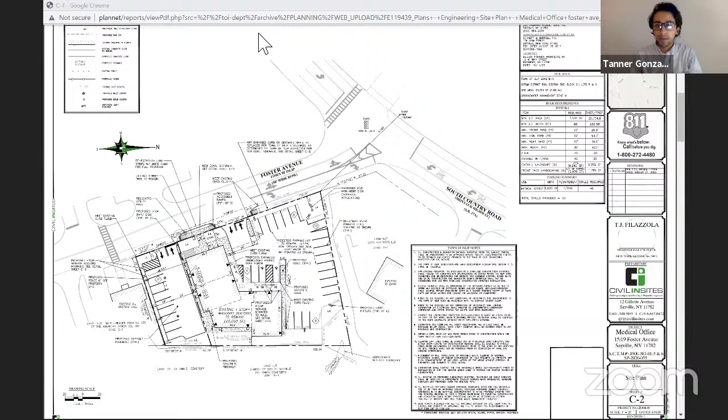Thank you. Any questions for the applicant or Mr. Gonzalez? I'm not seeing any. Mr. Garbarino, you're okay with what Tanner just said in terms of the 2 conditions? Yes, absolutely. And I'd like to say something.

I've lived here all my life, and this application where they're demolishing the 1 vacant building and putting parking in its place will really make this corner look good. Right now, it's this vacant building. It was a church, jammed in there for years. And then the previous hardware store was a laundry, and when they moved Brinkman there, they really cleaned up the area pretty good. But now with demolishing the church to the south, it's really going to make this corner stand out. So visually, I can see it only as an improvement.

Thank you. Is there a motion? Mr. Moriarty? Yes, I would move to close the hearing and to grant the application subject to the modifications to the conditions that Tanner outlined. Thank you. There's a motion by Mr. Moriarty to close the public hearing and grant the application subject to the conditions as modified by Mr. Gonzalez. Is there a second? I'll second. Mr. Ferruggia. Everybody had their hands up and only one had their mic unmuted, so we'll give it to Brian. Second by Mr. Ferruggia. All in favor? Aye. Aye. Opposed? Abstentions? The application passes.

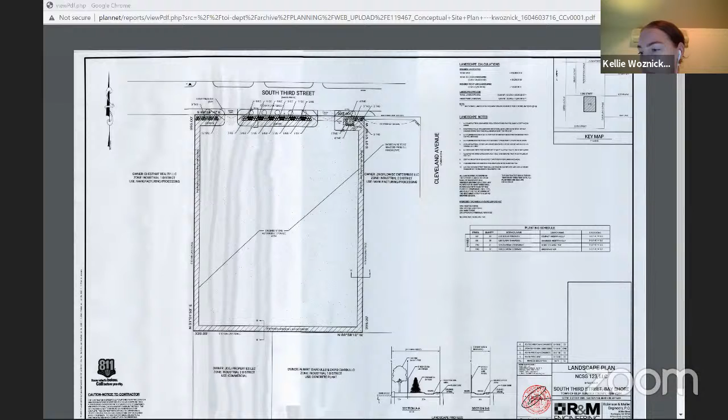The storage yard will be used for surplus motor vehicle dealership inventory and is located adjacent to industrial uses. The applicant is proposing a site plan which is in substantial conformance to the site plan referenced in the covenants and restrictions, with landscape and fence screening along South 3rd Street. Therefore, planning recommends the board grant the application subject to the attached conditions, which require screening of the vehicles and prohibit the storage of junked, wrecked, or leaking cars or parts.

Thank you, Ms. Woznick. Any questions for Ms. Woznick or the applicant? No, not seeing any. Is there anything further from the applicant? I'll take that as a no. Is there anyone who would like to make a motion?

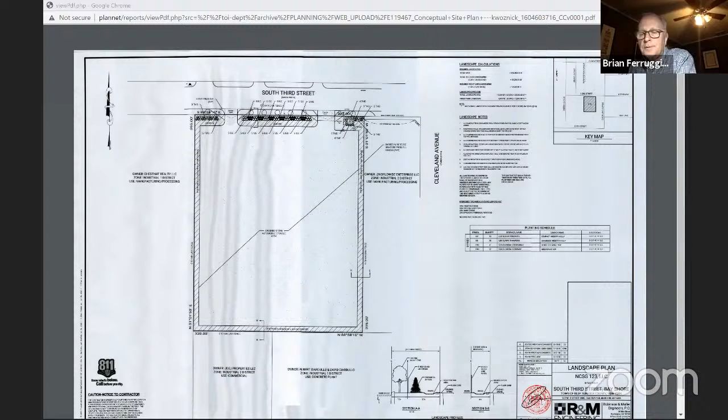I'll make a motion, Mr. Chairman, that we close this public hearing and grant the application subject to the conditions. Thank you. There's a motion by Mr. Ferruggia to close the public hearing and grant the application subject to the conditions. Is there a second? I'll make a second. Second by Mr. Matamore. All in favor? Aye. Opposed? Abstentions? The application passes. Thank you. Thank you.

Item 4 on the agenda, Planning Board application public hearing, Tian Li Li, PB 2020-025, east side of Constance Court, south of Kings Highway, aka Rabro Drive, County Route 6, Hauppauge, 11 Constance Court. Applicant requests a Planning Board special permit for a showroom in the Industrial 1 District pursuant to 68-340.1R. Site plan modifications may also be requested as part of this application. Good evening to the applicant.

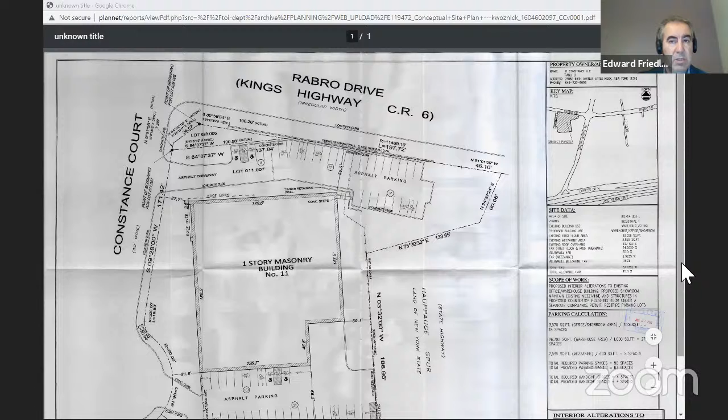Good evening, everyone. Hope everyone's doing well. John R. Bracco, architect, 111 Railroad Avenue, Sayville, New York, on behalf of the applicant Tian Li. We're here before you tonight in regards to converting existing office space to showroom space within this existing industrial building. The space in question equates to about 12% of the overall square footage of the building. The applicant, who recently purchased the property, owns a kitchen cabinet and countertop company and is looking to set up kitchen displays in what was the old office area.

This property does have a previous site plan approval, and the current site layout is nearly identical to the previously approved site plan. There is an existing mezzanine open to the warehouse and used for storage that existed prior to my client's purchase of the property, which is currently not on the CO and which we'll be legalizing with the building department. However, as you can see from the submitted site plan, the building still meets the parking and floor area ratio requirements with the existing mezzanine included. And if the board has any questions, I'll do my best to try and answer.

Thank you. I have nobody signed up to speak on this application, so I'm going to go to a staff report from Ms. Woznick, and then we'll come back for questions. Thank you. The subject property is located on the southeast corner of Constance Court and Rabro Drive in Hauppauge. It's improved with a 30,000 square foot industrial building that received a CO in 1985. In May, the property was issued a stop work order for conducting interior alterations without the required permits. Tonight, the applicant is looking to obtain the necessary showroom special permit in order to continue with the interior alterations.

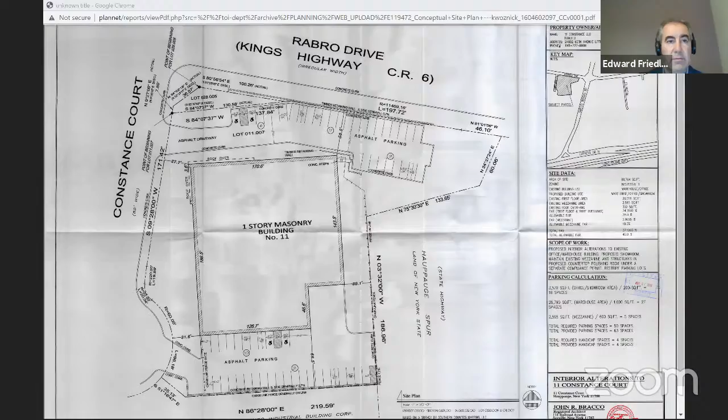Item 5 on the agenda, Town Board Application Public Hearing, 31 Union Corp. CZ 2020-019, east side of Union Avenue, approximately 283.25 feet south of Montauk Highway, State Route 27A, Islip, 31 Union Avenue. Applicant requests a change of zone from Residence B to Residence CAA District in order to permit 3 two-family dwellings. Site plan modifications are requested as part of this application. Good evening to the applicant.

Good evening, Mr. Chairman, members of the board. My name is Mel Gonzalez, MIG Architect, PLLC, located at 1050 Nichols Road, Islandia, New York. I'm here on behalf of my client for 31 Union Corp. Currently the property is a Residence B, and we're proposing a change of zone to a CAA district. The current property has 3 structures on it. The existing structure, which is on Union Avenue, is a 2-story, 2-family dwelling, which has a C of O and is compliant.

And the remainder of the property is mostly paved. I would say about 85% of the property is paved, very little landscaping. And there are 2 other buildings. At one time, this was a well drilling company, and one structure is a story and a half, and the other structure is a one-story barn. The one-story barn, which is closest to the town parking lot directly to the north of the subject property, is approximately 5 feet from the property line. And the existing structure to the south of the property is approximately 3 feet 11 from the property line.

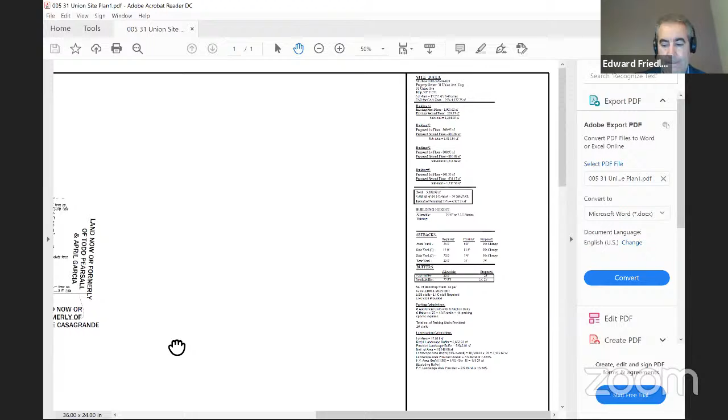Okay. And then one application that I looked at said that we were talking about changing zone GST to CAA. Is that a different kind of zone than Residence B? Everything I've seen initially that was sent out said Residence B to CAA. Yet on the permit that the applicant supplied, it says GST, G as in George, S as in Sam, T as in Tim. Is that a zone? Well, the call of the meeting tonight is change from B to CAA. Correct. I'm not sure where the other one came from. But it's in all the applications that were sent to the town planning board as GST. It's actually on the document that says Town of Islip Department of Planning, town board special permit, and it says existing zone GST, dated June 17th of this year. I'll ask the staff to address that part as well. Okay. So those were a few things that I'm confused about.

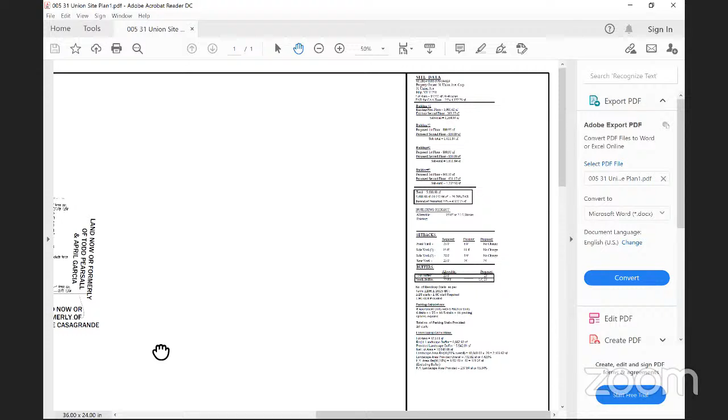I also wanted to know, is the applicant talking about using this property as apartment buildings, like a garden apartment? I'm very confused about how it will be used. Okay, so type of apartments. It's a residential area, and now it's saying 8 apartments on the site, and yet they're saying in other places 6 apartments. So is that because the house itself was a legal 2-family house? That's my understanding, but we'll readdress that once we go through the public comments. I'm just going to ask you, you're over 3 minutes, to please try and wrap up.

Okay, so my basic concern is I do think that this property has a much larger impact on the current zoning. I don't think that this should go through. Based on the fact that everything I see has a lower square footage than what the applicant is talking about tonight, I do think that this is going to stress the neighborhood.

When we walk up to that town parking lot and to Chase Bank, the rear of Chase Bank, on rainy and snowy days, there's a huge drainage problem there. It's flooded, it doesn't drain. You would almost need wading boots to get through there. That's never been corrected, and I don't see how adding more homes is going to help us.

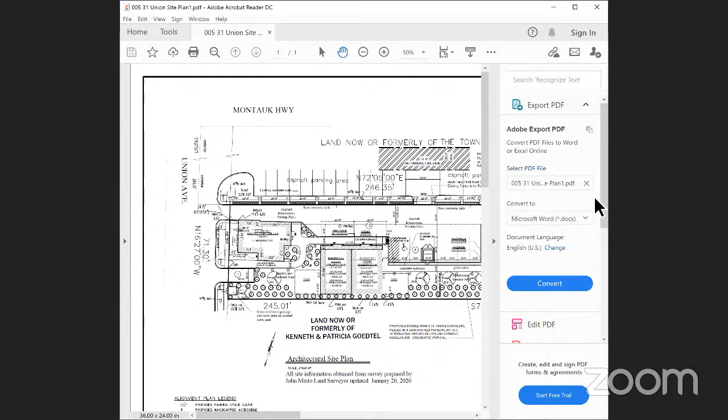Also, the entrance on the west side. You're aware that the entrance to the main parking lot is also on the west side, I would say 15 feet to the north of that. That's a very, very confusing traffic condition with people turning in and out of that parking lot and then also pulling into that same driveway. Has there been a petition to actually put a stop sign anywhere there? Because right now, that's a very, very busy turn off of Main Street.

Added to that, Union is the main traffic flow to the library. So you're looking to increase traffic on the single block by the 8 apartments. Question about the parking. If there's going to be 8 units, you can assume there may be 16 residents. The gentleman has already asked for a reduction in parking. But naturally, that overflow parking would fill the town parking lot, which is already extensively overfilled much of the day.

Those are my concerns. One question I have for the town: we know that we have a parking problem in the town of Islip, in the hamlet of Islip. This does not solve it by adding more residents next to a parking lot that's already over congested. Has the town considered this property for public domain in any way? I will ask staff that question along with the other ones when we finish the public hearing. All right, thank you.

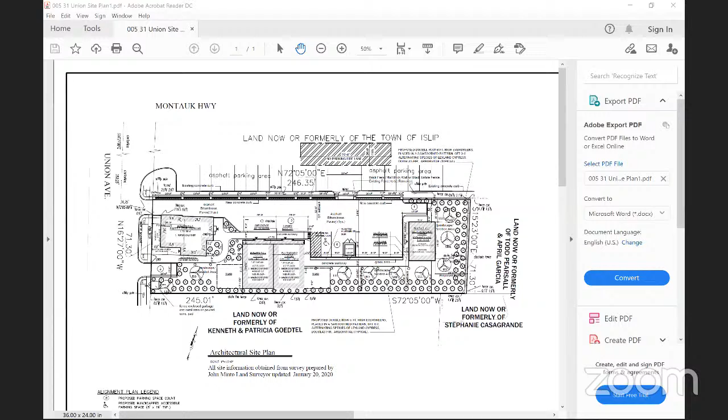Can't hear anybody. Mr. Chairman, you're muted. Can't hear me then. All right, how's that?

Can anybody address, was the original notification that went out a different change of zone, not from B to CAA? Did this start as something else? Is anyone aware of it being different? Certainly on what we have on the call tonight, it's B to CAA. Not to my knowledge, Mr. Chairman. Mr. Colgan, has it been B to CAA as far as you know? That's the way the town has received it and advertised it since its inception.

Okay. And then I guess there's a question about the lot size, what the actual lot size is here. Well, the town records indicate that it's actually approximately half an acre. It's not impossible that either the town records or the survey is incorrect. That was something we'd have to look into further to verify the correct number. I can speak to that effect, Mr. Chairman. There was an updated survey that was prepared by John Minto.

And on that survey, it lists 17,511 square feet, which is 0.40 acres as he's listed and certified on his survey. The survey is dated January 20th of 2020. So it's a fairly recent survey. Okay. So the information that is listed on the site plan is accurate. Okay. Thank you. I guess we'll check what we have on the town records to see if there's actually more. Make sure we take that property back.

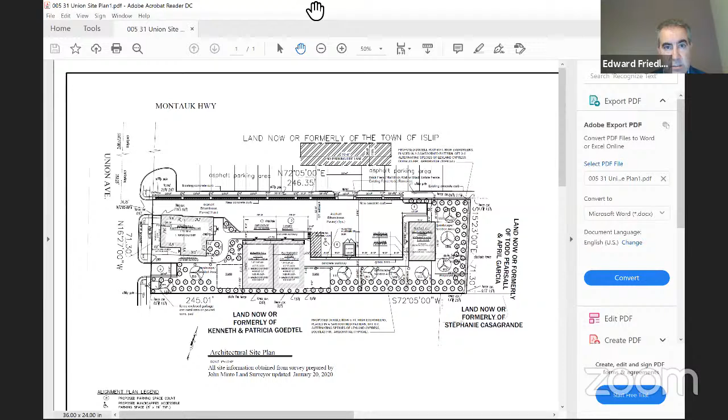Mr. Gonzalez, are they full 1-bedroom units with restroom? It's a full-sized apartment? Yes. Kitchen, restroom, it's not a rooming house, each unit has full facilities? Yes, it has full facilities. If you want, I'm more than happy to share my screen and I can show you the floor plan for these units. You can certainly do that, but as you're setting that up, Mr. Colgan, is that your understanding of what this application is?

My understanding, it would be 3 two-family dwellings, in which case there would be a total of 6 kitchens for the total property, and each building would be a 2-family unit. Again, 2 kitchens per building. That's how we define a living unit, is how many kitchens. Correct. Once you increase the number of kitchens, that increases the potential number of living units, and that's where we'd need some further clarification, because that may not be permissible with the proposed zoning district. Yeah, and we are maintaining the number of kitchens that are permitted, just 6.

I'm still confused. In the new structures, there are going to be 6 units. What's happening with the Union Avenue structure? That's remaining, that's existing, and that is a 2. As two what? As a 2-bedroom. They're going to maintain it as one 2-bedroom? They're going to maintain it as per the C of O from 1961. Regardless of what's there, my client will maintain that as per the C of O. Okay, so C of O, if it's considered a legal 2-family, you're making it a 2-family or a 1-family 2-bedroom? It's going to be maintained a 2-family.

So Sean, for Mr. Colgan, that's 8 units is what I'm hearing. So what does that do to our parking calculation? That makes it significant relaxation. Mr. Chairman? In addition to the parking and all the other issues that brings up, what the applicant has just described is completely inconsistent with the call of the meeting, and therefore even the advertising isn't appropriate. So I don't see any sense in even continuing this hearing.

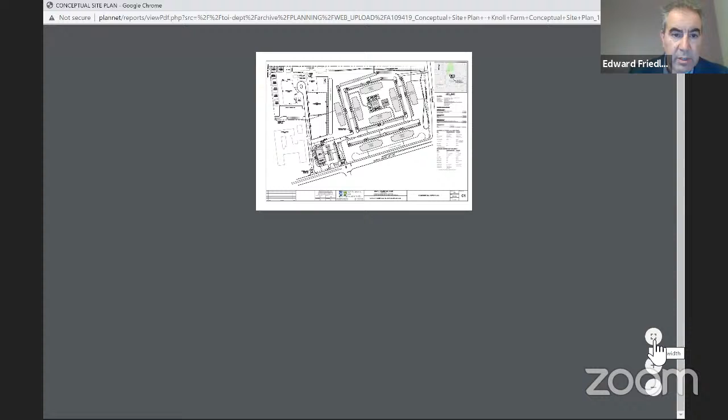I guess my concern is too much going on in there. And again, how many entryways and exitways are there for the development? There's a main entrance which has a light and provides access to the apartments and the commercial component. There is a separate entrance which provides access to the horse farm. That is how the horse farm accesses now. The horse farm also has a limited purpose existing access on the west that it uses in a limited way to bring some animals in and out. But the primary access for the horse farm is the existing entrance on Suffolk Avenue.

The fast food and retail component also has a right turn out option for people exiting, so they do not have to queue up at the light. They can simply come onto the traffic on Suffolk Avenue. Traffic has been reviewed by the town as well as the county. And it's a 17-acre site. It's a large site, and the horse farm is being preserved as an important part of that. But to preserve the horse farm, you need to have density allocated elsewhere.

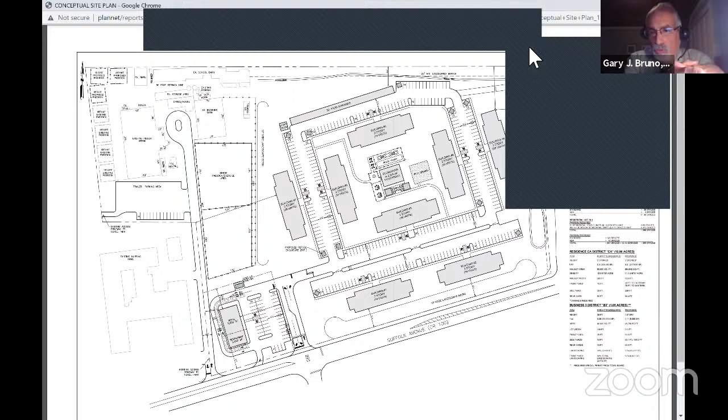Now, again, this doesn't help with the traffic or whatever, but from this point of view, the Brentwood neighborhood isn't really going to get any benefit of the preserving of the horse farm from the aesthetic view. Whether there would be apartments there or not, they're not going to see it, and they're going to lose a horse farm from their viewpoint. Okay, so I agree with the transit-oriented development. I appreciate trying to preserve the horse farm, but this layout, as it is, doesn't really put those in the best layout.

And I realize the horse farm exists where it is now, but if I wanted to lay this out to have these two together, the horse farm would be what you would see on Suffolk Avenue, and the apartments would be tucked back in the corner. So I just wanted to make that observation, because I'm thinking about what it's like when you drive down Suffolk Avenue, and it would have been nice to preserve that look. I think that's what a lot of the residents were talking about.

Mr. Chairman. Mr. Bazell, I think you're muted.

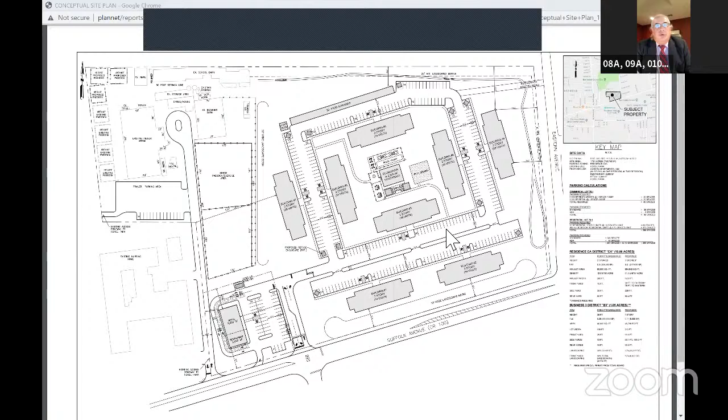That's a new comment and obviously a complete redesign. Part of the aim was to try to leave much of the back, not put the buildings close to the rear line. You put the horse farm up front, you're going to push those buildings into the back. And that was also a concern. A lot of the horse farm improvements are existing, which is also a concern. And I'm not a horse person, but I'm not sure if those horses were in proximity to Suffolk Avenue most of their day, whether that may be disturbing to them.

Thank you. Mr. Matamore, did you have a question? Well, a question and a comment. The question involves the retail. You've talked about dry retail and a coffee shop. And certainly the coffee shop seems to fit in with the idea of being across the street from the railroad. But the retail, I haven't had a chance to learn what that retail is intended to be.

Mr. Bazell, are there any ideas yet what that retail is planned to be? We know the coffee shop, but the retail puzzles me. What is that going to be used for? My client doesn't have any tenants or prospective tenants for that building. Anybody he was talking to in the past has disappeared with COVID.

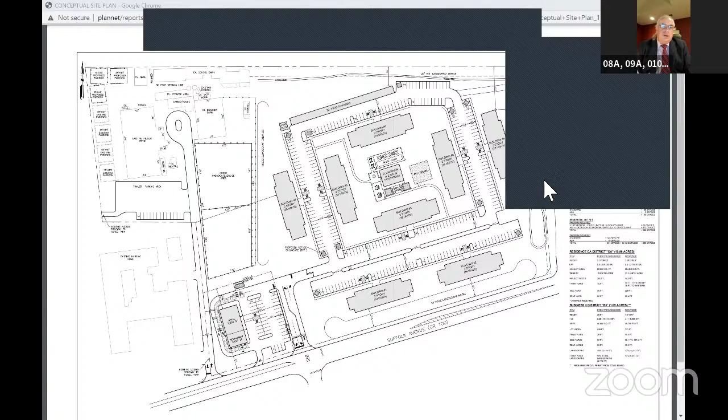It's not a big space. It's not going to be a restaurant. It would look to be something that would be more designed to serve the apartments and serve the local community. But I don't want to tell you there's a tenant for it or it's been locked down for a particular type of use, because that's not the case.

Okay. Well, which leads me to the second thought. Knoll Farms has been around now as a question mark for probably 40 years as far as its zoning is concerned. It's AAA zoning, 40,000 square foot zoning. And for many years there were efforts by various persons to try and develop it with larger lots, and those applications never went anywhere.

And I was aware of the cost of a horse farm on Long Island, or indeed any farm, but particularly horse farms that require a lot of traffic movements from out of state to bring supplies in. It has become prohibitive because Long Island's traffic is a problem, not the traffic on Suffolk Avenue, but the traffic going from here to the bridges. And I know one of the former owners of, I believe, this parcel ended up having to move to Kentucky in order to continue to do what they're doing.

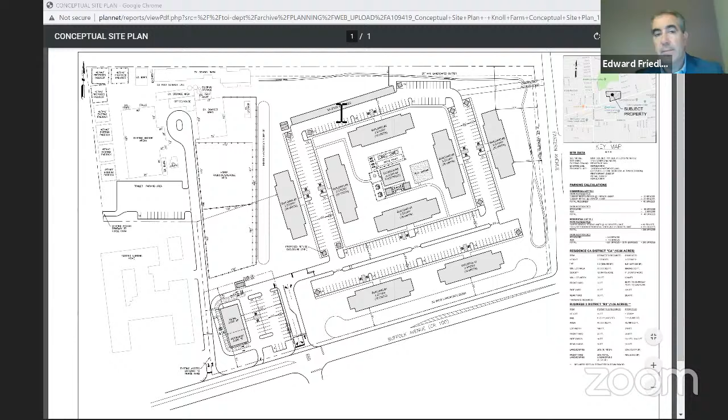Mr. Buzzell, is there any room for you to talk to your clients on some of the suggestions that were raised by some of the board members this evening? Well, I think given the comments we've heard, for me to go back to speak with my client and for us to speak further with planning is the way to go at this point. Certainly things need to be reviewed and evaluated, if only for everybody to satisfy themselves that every effort was made to do so. Great. Thank you on that. With that, I'll take that as a motion for us to reserve decision tonight so you can have those discussions and come back before the board.

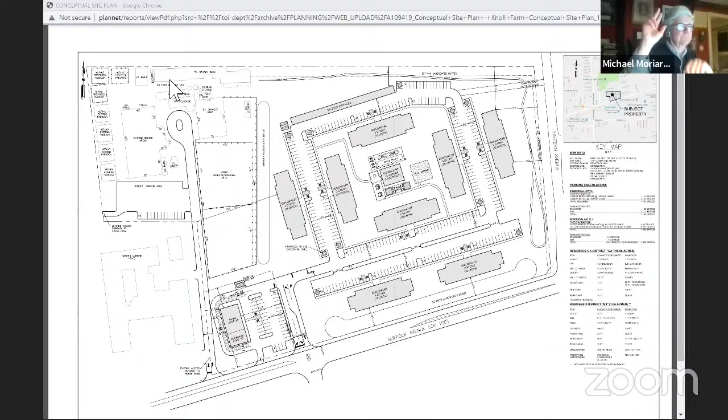Understood. Is there a motion? I'll make that motion, Mr. Chairman, since I did more talking than I should. I'll be happy to do that. Motion by Mr. Mattimore. I make that motion that you just suggested. Motion by Mr. Mattimore to reserve decision this evening. Is there a second to that? I would second. Was that Mr. Moriarty? Yes, it is. Okay. And second by Mr. Moriarty. All in favor? Aye. Aye. Opposed, abstentions? Reserved. Thank you.

Item 10 on the agenda, Town Board Application 227 4th Avenue Bayshore LLC, CZ 2019-020, southeast corner of 4th Avenue and Cherry Street, Bayshore, 227 4th Avenue. Applicant requests a change of zone from Industrial 1 District to Downtown Development District in order to construct a mixed-use building with 30 apartments. Site plan modifications are required as part of this application. Good evening, Mr. Bazell. Is that you again? Or is that Mr. Glass?

Or do I have? Is the applicant here on item 10? Mr. Glass? Mr. Bazell? Anyone? There we go. Hello? There you go. You're back. There he is. There you go.

Mr. Glass, who's also with us, is the principal of 227 4th Avenue Bayshore Associates. For the record, Joseph F. Buzzell, Lamb & Barnosky, 535 Broad Hollow Road, Suite B4 in Melville. This application was before the board a few months ago, well, it was before pre-COVID actually. We have been working with planning. We've made a number of changes since that time.